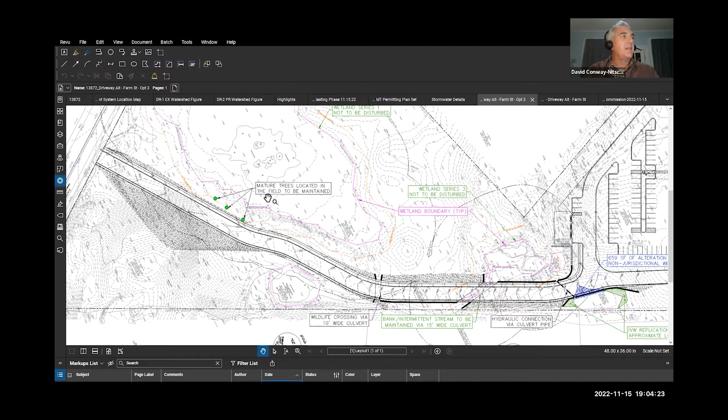Working from what we've heard in the last meetings and also the site walk, we revised the layout. If I miss anything from the folks that were there on the site walk - Dan, Jim, Rebecca - please speak up. But this is a revised layout, and what we've done, starting at Farm Street, is we've pushed the road farther south, so that we're now almost completely out of the 25 foot. There's a little work being done in the 25 foot of wetland one.

The green dots are some trees that we field-located on that site that we want to, as best we can, keep and not impact. One's obviously close, but this tree, for example, used to be in what would have been the middle of the sidewalk or on the edge of the curb. So we were able to pull the roadway out of the 25 foot in this area and save some significant trees that add a lot to the site.

As we move farther down the road, we pushed - and this sounds a little counterintuitive, but it was a good observation from the site walk - in this area here, just north of the road, there isn't any significant vegetation. By pushing the road a little farther away from wetland 2, we give it more space to breathe, and maybe present some opportunity to have some plantings along here as a better buffer.

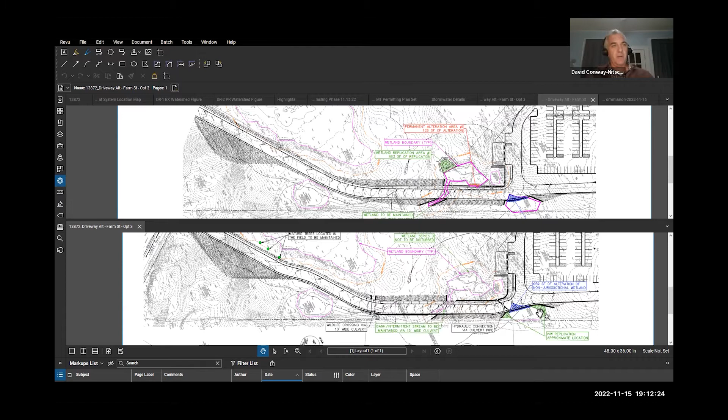Are you also adding the wetland replication area down by 4? Yeah, and that would be one of the more detailed things that we would need to figure out, because if you go out there - again, it's not jurisdictional, so it's not required.

There seemed to be an easy way to add some replication area, and these areas are approximate, because I think as a group we wouldn't want to - let me zoom in on this area real quick - if you go out there, this area has trees in it, right? And just to hit some sort of number, I don't think it would be right to say we're going to triple the size of 4. We'd have to cut down trees and start regrading to do that.

And to me, that kind of gets to the point of where you start chasing your tail. So what we'd want to do is map out where we can do some replication that's not really going to alter the landscape. We're not going to start cutting down healthy trees to get 3 times the number when we don't need to do that. But we'll take our cues on that from the biologist and from you folks.

Yeah. So it lined them up. There we go.

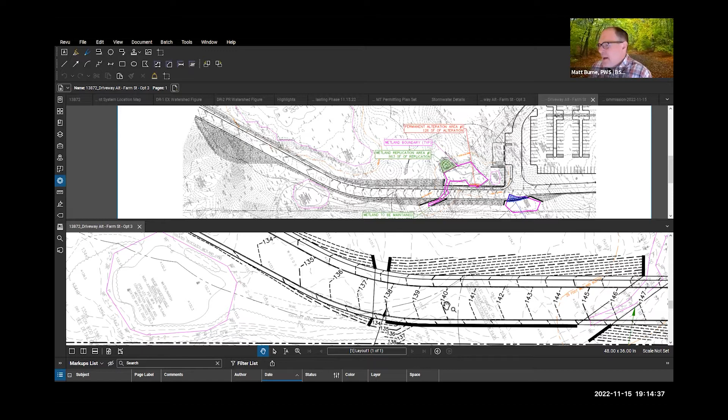Yeah, I don't think that was a big deal. That's the fine tuning, you know what I mean? You can see we have the grading even across it. We're working to make this one, just so you know, like even today, figuring out what's a good height that makes it a viable wetland crossing. But that's the type of stuff that we want to incorporate into a final version of that.

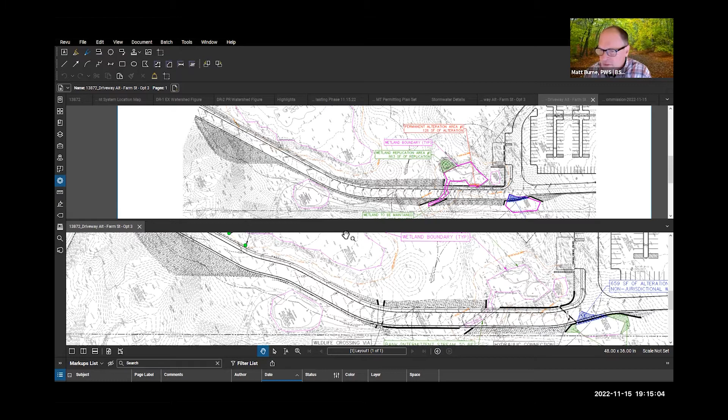So if the commission is agreeable, then you'd go into some finer detail on actually figuring out how it's designed. Yeah, and we can pull those back, so it's not like a feeding tube, you know what I mean? I think that's what you're getting at, right? Kind of a wider opening chute.

Now, I'm curious about non-jurisdictional wetland 4 impacts, the addition of that drainage. Is that necessary just because of the volume displacement that would be required for fill, or what was the thinking on that?

So it's not, it's from the engineering standpoint, Matt, from what I understand, it wouldn't be at an everyday elevation where this thing would be draining out constantly from 4 to 3. So we have to very carefully pick that elevation so that it would replicate where that area currently overflows.

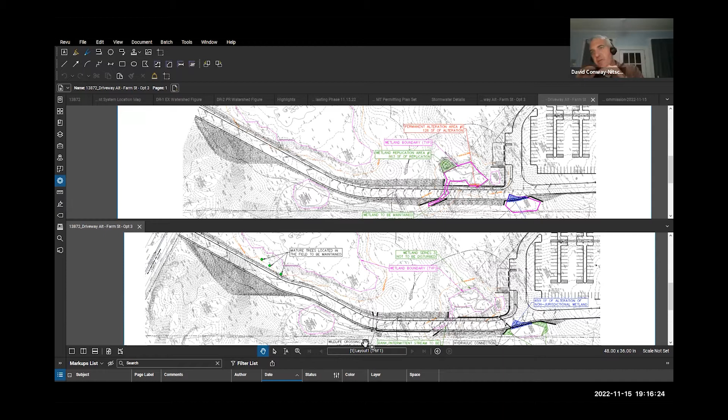And so it's going to be some variation, I forget the number, but we have to go out there and look. We have these contours on it, but it undulates around the edges. So I think we've got to look at where we think it overflows, shoot an elevation, and that's where that pipe would be at. It wouldn't be up against the bottom of the wetland or anything like that. So we have to carefully figure out how that's actually working when it does fill up, and then we can set the elevation at that. And that doesn't change the landscape for the jurisdictional status of that.

Okay. I believe we've had some abutters or public members observe water under certain conditions making that route. I've actually seen it, we were out there. We actually have video of it.

Dave. Yep. The 100-foot buffer actually extends out to include a lot of these non-jurisdictional areas. Wouldn't they be offered buffer zone protection because they are in the buffer zone? Yeah, so the work with them is all part of your jurisdiction.

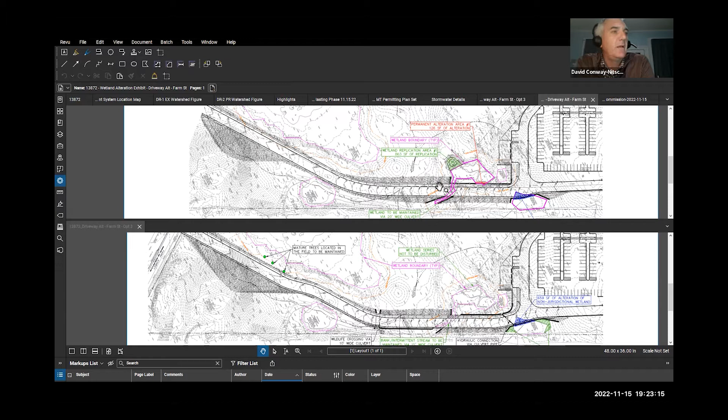So any other thoughts, and if it's easier for folks—I have one more question. Did you guys do any test borings along the proposed roadway? Not the big test pits, but any kind of borings?

We did, and I know you asked me that while we were out walking. I just don't have that handy. Maybe Paige can pull that up while we're talking, but we did do it. You know what, hold on, give me two seconds.

So this is the same version as what was just on your screen, except what we're showing here is the blue line with the dots, which is the stakes and the center line of the road first proposed back in October that we talked about. And we have a test pit here, we have a test pit here, and a test pit here.

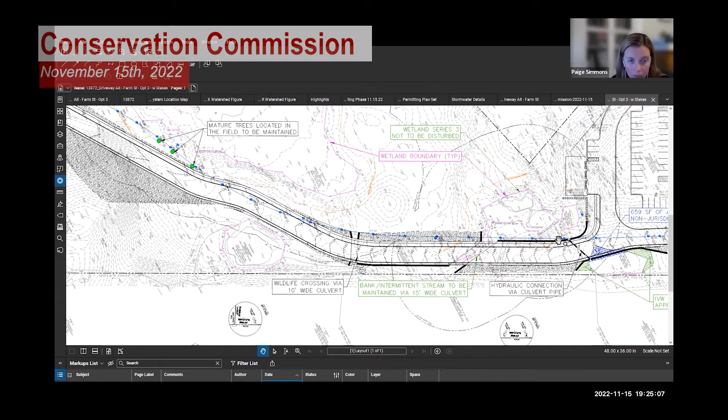And the fourth one you didn't get, right? They only did it in this area, and then looks like there's one they couldn't get to. I don't think we did this one. I think that was one that they wanted to get and they didn't get it. Right, but there were too many trees there. Yeah, I think you're right. Also one right up by the top of Farm Street, at the very top. Oh, there it is.

And Paige, just correct me if I'm wrong, but do you remember? I think they're all fairly shallow to bedrock. I don't know off the top of my head. Well, in general, the site was shallow to bedrock. Shallow being what, 2 feet, 3 feet? Probably in these areas, we'll get you the exact numbers. I know when I was there, they dug one hole, the hole that I saw, they were down 5 feet.

So I'm still questioning that, because we were going to talk about ledge blasting and maybe avoiding blasting, or is there other ways to get your utilities in there that would protect it from frost and not create any damage by blasting? And so unfortunately, no, right?

We're going to have to blast. The water lines require 5 feet of cover. The storm system, just even removing the ledge from this knob, we're going to have to blast to do that. And blasting is actually the least intrusive kind of method of having to do that rock removal.

And we did talk to one of our blasting experts, and I know there was concern about whether we're going to crack the rock beyond the blast zone and impact the wetlands. And what we've been told by people who do it for a living is that any sort of fracturing of the rock—what they do is pre-drill the blast holes on like a 4 to 5 foot spacing, pack the holes, and then make the blast. There's no cracking of the rock more than half the distance of the spacing from the hole. So 2 feet from the blast hole would be the extent of any rock cracking that you would expect.

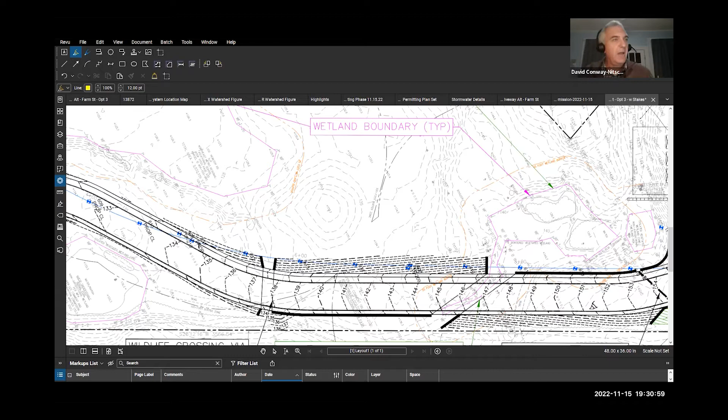But you know what, that's an exercise we can do. We can kind of, once we start to layer on these utilities, because obviously we're not looking to do more blasting than we have to. If I was to look at this section, say through here, we can have the water line under the road in a fill section.

That's not an issue, so that's something we probably could do, like a little color coding of our best guesstimate. Sorry, I interrupted you about the ledge that Joe wanted you to talk about. Just that the trade-off is moving away from the wetlands and wetland impacts - we now have more ledge impacts.

Dave, one other thing is I was scaling off the section where you've got it being sloped on both sides of the road, which you don't have now. Well, yes you do, but the width ends up to be like 75, 80 feet. Is that about right, from toe slope to toe slope on each side of the road? No, down the other end towards 3, in this area here where you're going grading, just off of...

Can't read it. I'm just putting this in because I can adjust it and you can tell me kind of where you're talking. So what kind of dimension were you looking at - right where you'd get these 2 wing walls?

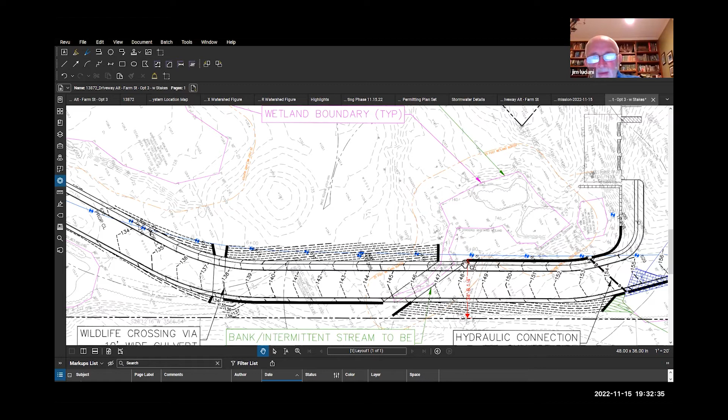Would we be better off to do a wall on both sides and have less disruption? What do you got for here - 50 feet? Yeah, it's like 50 feet, about 50 feet. Okay, my drawing was showing more. Let me make sure I get the right scale. Nope, I don't.

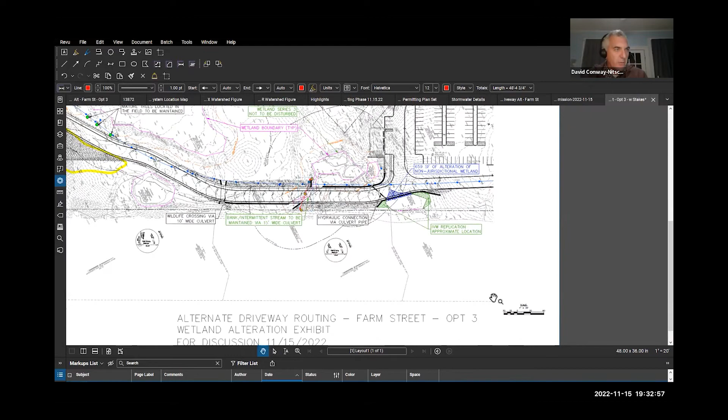So you're... the danger of electronics - we actually had a lecture on this in my office the other day. Sorry.

That's like 70 feet, something like that. Now these again, so these are 2 to 1. So one thing - I think it was Matt - I'm hearing a desire that maybe these get opened up a little bit more, so maybe this comes at a little bit more of an angle or something to address that.

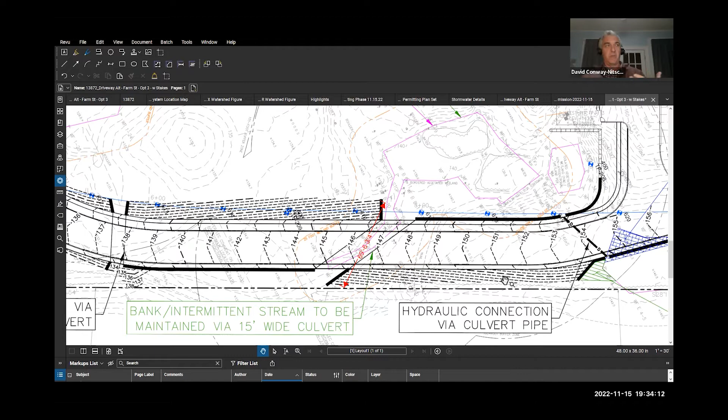But then again, these contours were created at 2 to 1. So there's also areas where, if there's a desire to kind of draw that impact in a little bit, we can do it without walls by just doing riprap. Now there's areas I definitely wouldn't want to do that because I don't think it's kind of what we'll be looking for. But if it... again, that's kind of the next layer.

If there's some - we can with this layout, it's now easy to walk out there and say, I don't remember them being there, but if there were significant trees like we picked up over at 1, what can we do to kind of work around those?

I can follow up on Jim's question about the depth to bedrock. I just checked the geotech report and it ranges from 4.2 to 5.6 feet across those 4 test pits along this portion of the roadway. So it wouldn't be much blasting then anyways, right?

So it sounds like it's about a foot of conflict between... Yeah, so at that level, to get the water line in, they're not blasting - they'd probably chip or drill and chip or something like that. And then we'd have to see where the stormwater detention system's going and the elevation that might need to be blasted out. But yeah, you're right, if we're sniffing around that, in general they try to avoid blasting where they can.

It's not... and that was from Paige, that was from existing grade, right? So you're actually up about a foot in that area anyways, aren't you, with the finished road? So you actually might have it, or pretty close to it. Yeah, and also in general we push the road up, you know what I mean? So the test pits were kind of down closer to the wetland - in general we're now up higher.

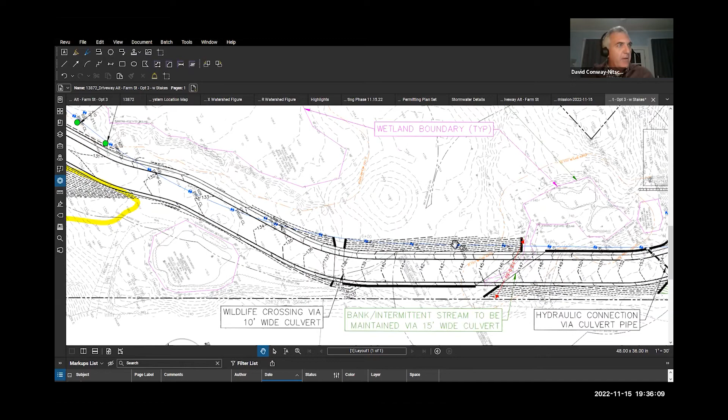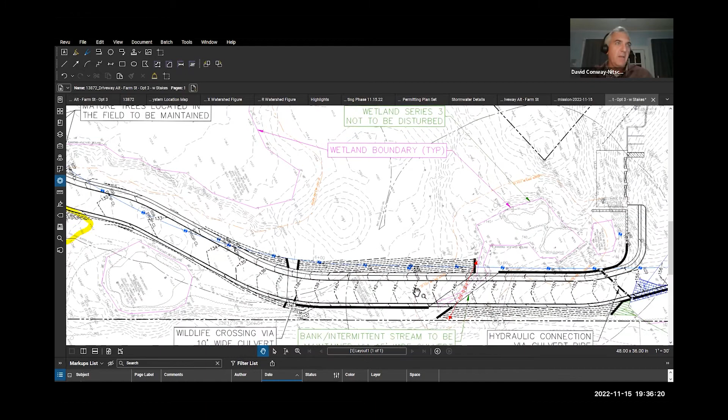Through here I think we can safely say we're in ledge, but down here, just even at existing grade, we push the road up higher and farther away. So actually it's something we can look at and kind of do a little color coding of our best guess. Yeah, you may just hoe ram there and not need to blast at all. Sometimes what they like to do, and it's actually the best because hoe ramming - even they'll pre-drill and then hoe ram. Yeah, that's kind of a nice method, especially for trenches and things like that.

Now you have to give all your blasting data to the fire chief, right? Yeah, they have to pull the permit with them, and they have to give a drill pattern and all that stuff too. That goes to the fire department?

I've never gone through one of those submissions, but I think we can have someone submit the blast plan, marking out the areas where they're going to put their monitoring.

There's a lot about storage, a lot about procedures. Just so folks know who are listening in, the people who do this is all they do, they don't do it on the side. These firms are multi-generational, so it's not wily coyote type stuff.

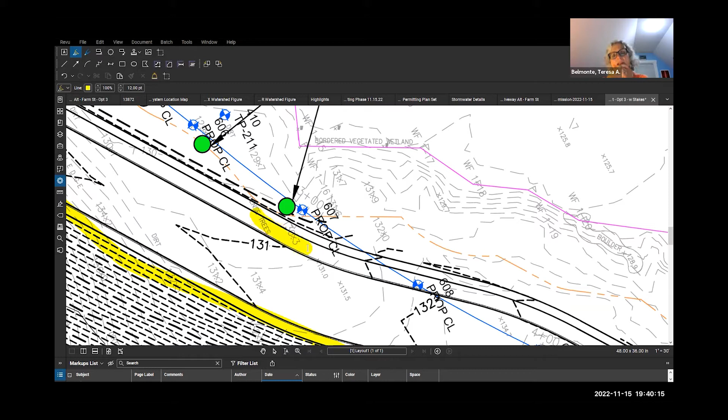And that outermost strip that you see is actually the landscaped shoulder. So the sidewalk ends right there.

I was even suggesting for this specific tree, like other thoughts I've seen done is, okay, the school's not going to be built in a day - what if we get towards the end and this tree is obviously failing? Not that we would go out looking, but what would its replacement be? What can we do to make that right?

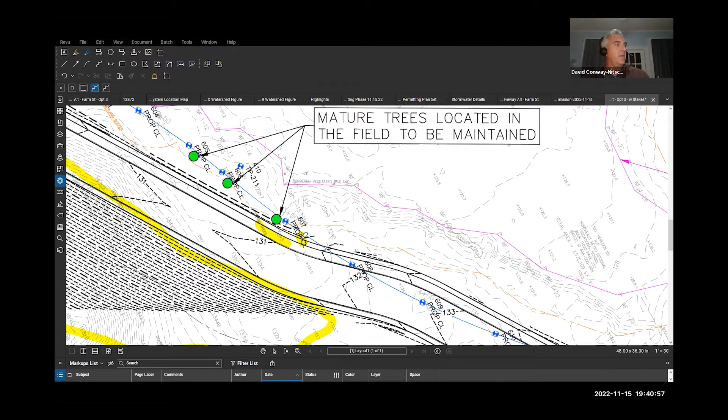But I think that's something for you guys to take another look at. I think there were trees behind this one that were just not shown.

We kind of use this one as like the fence. There was a grouping - anyone who was there that day, I think there was a grouping behind this tree that was fairly nice. We used it as a fence to build a new alignment off of.

Well, it's gonna rain tomorrow, so I'm gonna go out there and see if I can see some water flowing.

So I don't know if you guys - it's 7:40, do you want us to walk through some of the stormwater management and approach? Again, we're doing this at a level so you can see how we undertake the analysis, so you can have some comfort with it, but not like a peer review level.

Do you want to let anyone comment on it yet? Bob, any of the abutters or anyone? Before we go too far, first of all, does the commission have any other specific questions related to this driveway and the changes proposed?

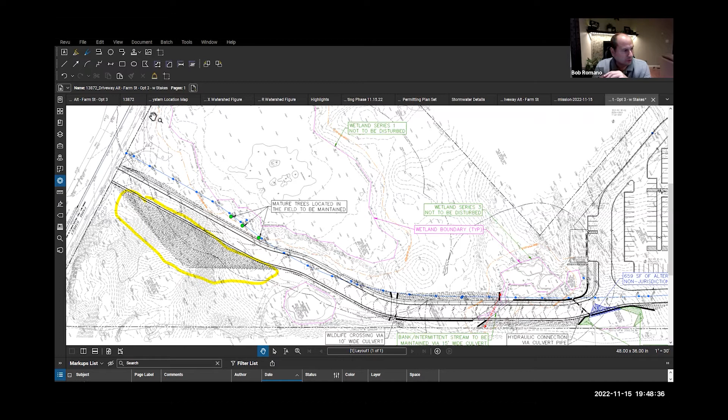All right, so we are a little bit at a crossroads. We could start a stormwater management discussion, or we could hold off on that for a bit until our own peer reviewer has a chance to review what is already there. If we choose to do that, I'm asking the commission's opinion.

We could also right now just open it up to the public for their questions instead of getting into stormwater. What's the commission's feeling? I was under the impression we were trying to satisfy one of the comments, which was that we go for such a long time that people forget what they were thinking of at the start. So this was just a method to break it up so we got a few questions out and then move on. Okay, yeah, I think it's a good idea, so we can do that then.

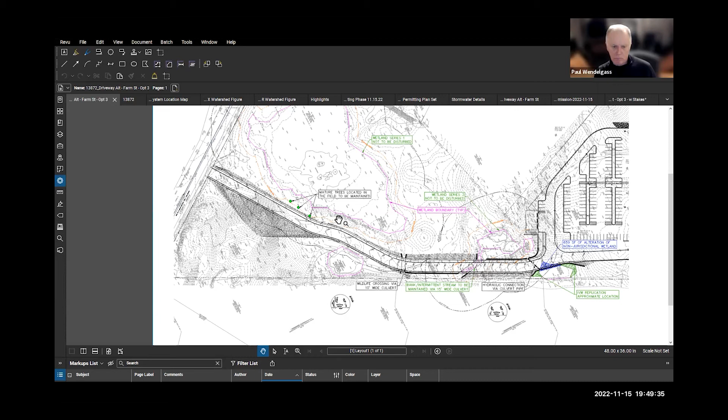We can open it up to the public for Mr. Chairman, questions. Um, if I could briefly, somebody's trying to say something? Joe, actually. Oh, that was sorry, me Joe. If I could. Oh, no problem.

I would just like to request clarification with the timing change. Does that mean that if we're going to the public comments, we won't have a chance to talk about the stormwater? Because I know we've been talking about it for a couple of meetings now, and I would really hope that in consideration of switching the schedule around, that once we hit 8 o'clock we don't say, well, it's been an hour now and we can't talk about it again, because then that's a month and a half of talking about it.

So let's see what we have for questions, how quickly we can get through those, and we could begin a stormwater discussion after that. You just took a couple minutes talking about it. True, got me on that.

If I could ask one question for the applicant team: with the changes you need to carry forward, does that materially affect your stormwater design? No, and actually what we're going to put up there was from the first version you guys really didn't like, just to kind of show you the concept, and the concept's not really changing. As far as the stormwater strategy for this area, the approach is still similar, but we have to work out more details, again focusing on the engineering, not having concentrated flows, things like that. But the approach of capture, clean, and detain is still the same.

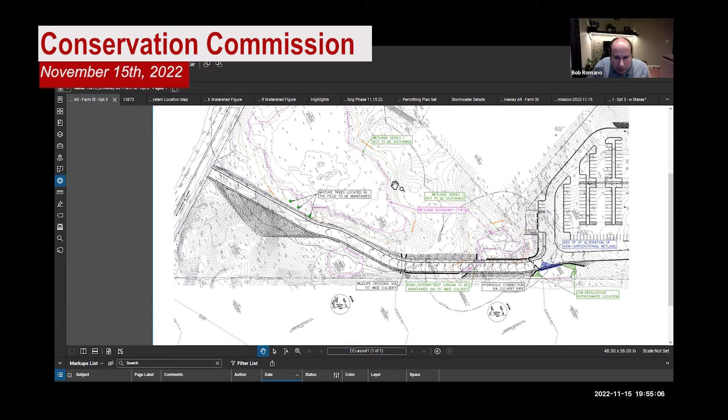So there are three connection points - well, two hydraulic connection points shown and another wildlife crossing. We've talked about what the heights of those would be, and the newest one we don't know yet. But there was talk about that first culvert being of sufficient height to let pretty much anything through that would need to get through. I don't remember what that height was.

So that's kind of the stuff that Matt covers in his letter, making sure you design these to meet the needs of the wildlife - where he talked about pulling back, since this isn't like a feeding tube for something, pulling back these wing walls and making this more wide open. That's the stuff we'll start to detail, start to draw in more detail. The preference would be that larger mammals would certainly be able to get through there without crossing the road.

Jennifer, I don't know if that answered your question or not. Yes, thanks. Okay, I'm not sure who is next, but we'll go alphabetically. Christine?

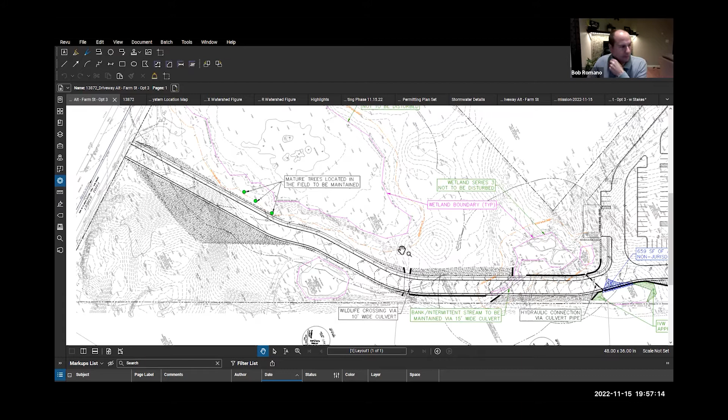Oh, no - can you just post it so everybody can see it, for the record? Oh, excuse me - Woodland Road, Wakefield. All right. I don't see any reason why we couldn't put it on our website. That would probably be the easiest option.

Did that answer your question? Absolutely, thank you. You're welcome. Linda, please go ahead. Linda Ireland, Nowell Road in Melrose.

Just to follow up on Jennifer's point - the actual interaction between all those wetlands is pretty complex. The way this culvert, the Series 3 culvert, is sending the water south east, that stream actually curves back across into that roadway and heads towards Series 1, and I don't see how that's going to happen. Whereas if the roadway was elevated there, you'd be minimizing the impacts on all of the hydrology of that region and the amphibian migration, because this is spotted salamander territory, as well as other amphibians.

The other point I wanted to make is that the area that's going to be blasted is priority habitat for the Hentz's red-bellied tiger beetle. It's mapped priority habitat - that's a rock outcrop, and it adds to the overall damage that this project is inflicting.

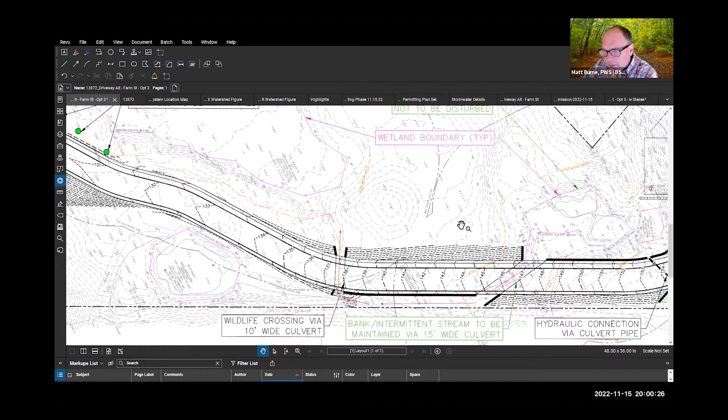This was all done in reaction to maintain this corridor. Based on the contour mapping, it does look like you've hit those points. I think the turn back toward wetland 1 occurs actually over the property line in the right of way, by the looks of it.

Yeah, it's just being a fuss budget. I get it, water doesn't respect the property line, but I think you also have to think about maintaining the water.

Yeah, and visually we have a graphic for you that we can show how we consider that one of our design points.

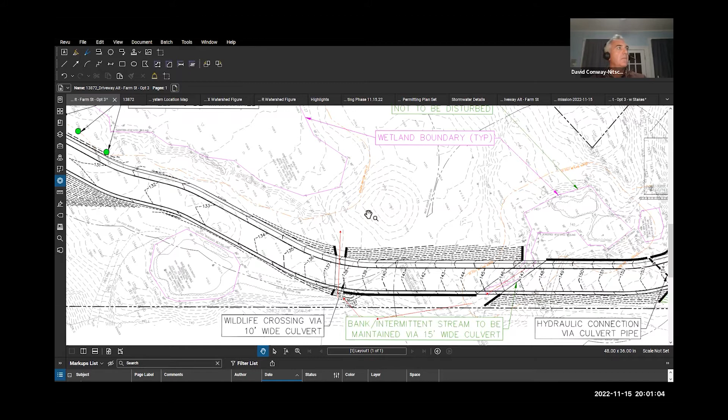Sorry about that. Bob Brooks, 7 June Circle. My question is, when you're talking about this roadway, it does go from the elevation downwards towards Farm Street, correct? And I look at, there's a low point actually in a little bit here.

So we're looking at about the foot marker — is that the elevation in feet, or is it just marking distance? What would be the elevation difference where the mature trees were area compared to back over where the culvert was?

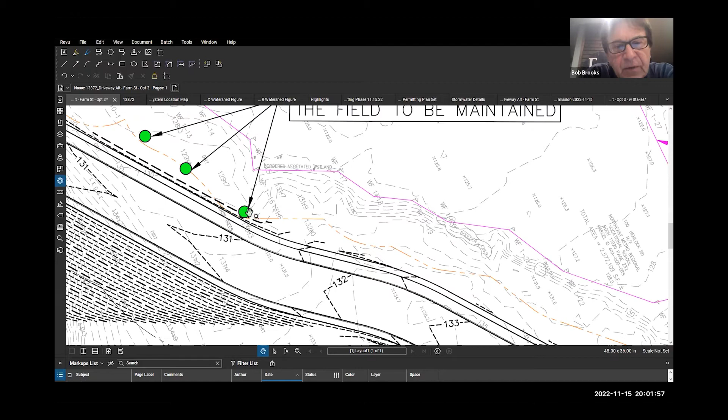So from here, go back towards the school up the road. Keep going, right about to there. What's the height difference in this?

Well, you could go back a little bit to your left, Dave. Not to give you exacts, but — I'm sorry, just a reminder, let's let the chairman direct the questions. Yeah, thank you, Joe, sorry about that. It's just human nature, we want to just reply, and it's conversational, but it should run through you.

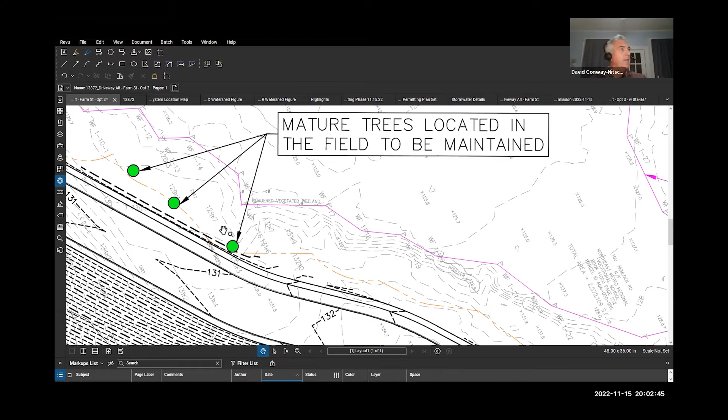Well, what are those elevations? So, these are at about elevation 140, 141. And then down here we're at 129. Okay, so there's about a 10-foot difference, correct, in elevation?

10, 11. Okay, my concern is that with that elevation and the amount of water or drainage that's going to be into wetland series 1, I think it's going to be more excessive than it is now. The question I had, because I've asked this before, and everybody's seen where the small culvert is — how do you regulate how much water gets put into this wetlands from this proposed roadway? Also, does the town engineer have a plan for this yet, or is this still in the planning stage?

So we will talk about the water budgets and what's happening in each of the wetlands. We don't want to see more water put in or less water put in that would alter the wetlands in any way, so that is something we definitely have to review.

Does the town engineer have a copy of these plans? Can someone answer that? I don't know if the town has this plan. The reason why I asked about that is because I've been down to the town office before, quite a bit in the past, and asked, and everybody keeps saying, well, we don't have a plan in front of us, so we really can't comment on it, which I understand. But—

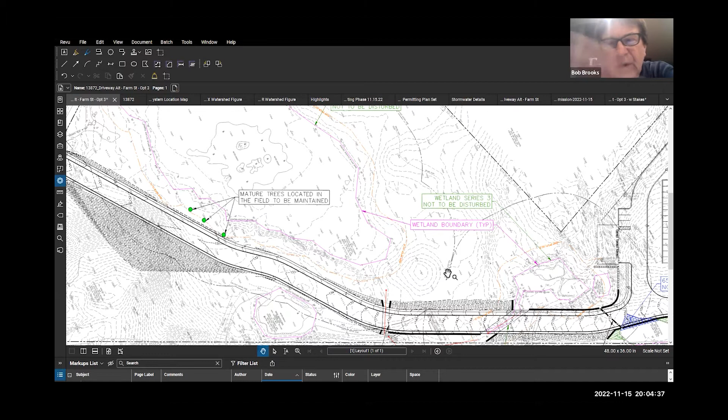The Northeast group has mentioned that their responsibility ends where that culvert is that drains into the June Circle area. So if their responsibility ends there, then the town's responsibility, I assume, gets picked up where the culvert is. That's right, Bob.

So should the town engineer be aware of this potential area? And how do you measure whether there's going to be too much water or too little water? Is there a gauge for that?

Well, that's a good one for Dave to think about, because we have to match the flow that's coming out of it now — whatever is there. That's why I'm saying you're going to have to talk to him. I don't know how they do that.

Okay, so that would kind of be answered by our stormwater overview — what the standards are, how you quantify the existing conditions, how you quantify the proposed conditions, how you regulate the proposed conditions to mimic the existing conditions, where you look at it.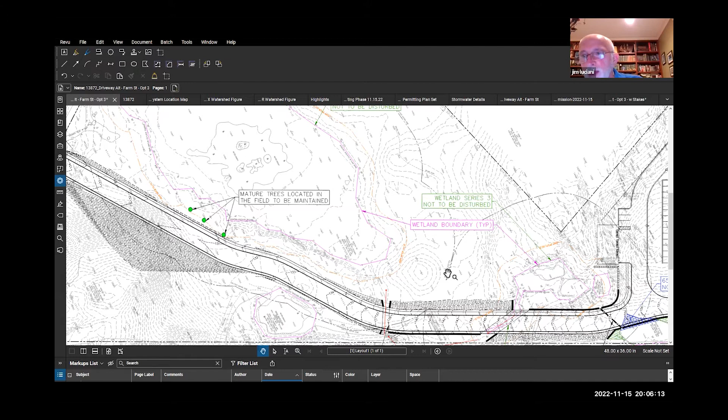Were you referring to a different Dave, by the way, or this Dave? Jim? I'm sorry, I was asking Jim. Oh sorry, were you referring to Dave from the town or Dave on the line here? I was talking — no, Dave from the — no, there's no Dave in the town. Are you talking to me? Yes. What was the question? No, I was just confirming you were asking this Dave and not saying you had to talk to somebody else. All I'm saying is your obligation ends at your property line, and then the town picks it up. So to answer the question, Jim was talking to Dave Conway. Yeah, I was talking to Dave up there. Sorry.

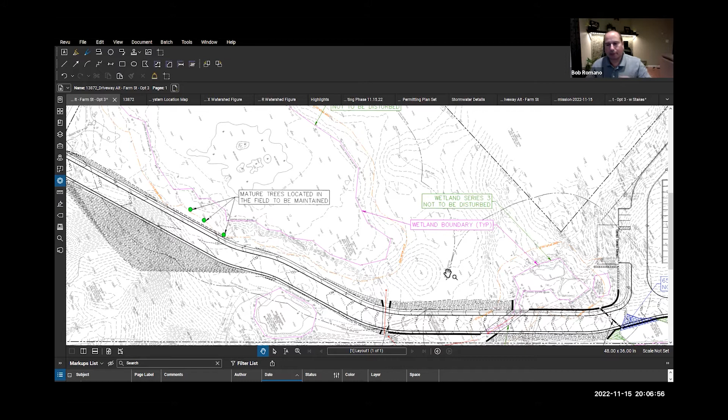Okay, so. All right, I don't see any additional hands raised. So we could start talking about stormwater, give it a little bit of time and see what you have to show us. So what I'd suggest is, do you have a target time you'd like us to present? Because we could talk stormwater for days, or we could do it very quickly. Yeah, I know there'll be additional discussion no matter what we talk about today. Let's maybe target a half hour and see what happens.

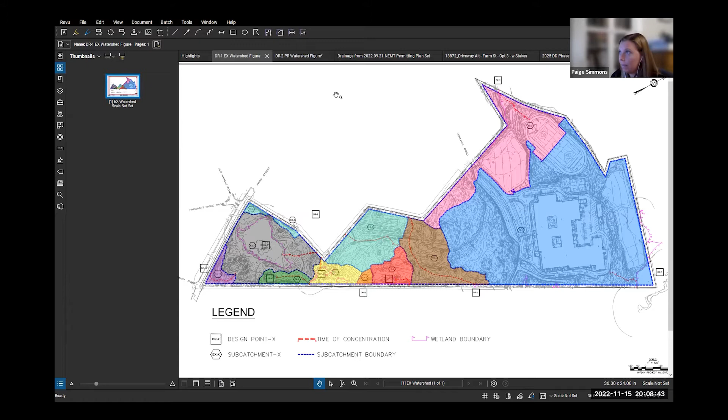And then these same 10 design points are then modeled in the proposed condition. You can see there's various subcatchments, but the design points from the existing to the proposed are maintained to be the exact same points so that we're comparing apples to apples.

And then in the proposed condition, we go through the same process of mapping out the impervious area, the pervious area, the times of concentration, and all of that is input into a stormwater model, which calculates the rates for the 2, 10, 25, and 100-year storm, which is the Massachusetts requirement. And then we compare those rates for each storm event to ensure that we're not drastically increasing flows at any location.

So that's just the big picture of the hydrology and our interpretation. And as Dave mentioned, as that roadway or driveway is finalized, those design points along the driveway will be reevaluated to make sure that we are matching as close as we can the rates at each one of those design points so that the wetland series are not affected. But that will all come as that roadway or driveway is tweaked and we come with a final layout.

And then to touch on the hydraulics, our proposed design right now is a closed drainage system. What a closed drainage system means is it consists of catch basins to pipes to drain manholes to water quality structures to detention systems. And the water is captured in those systems and then conveyed to the various different outfalls.

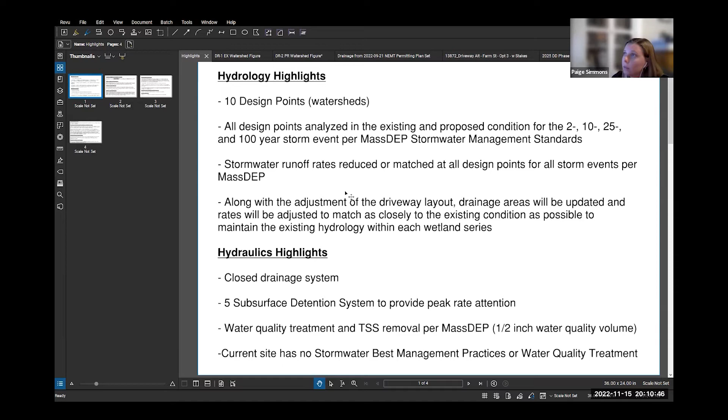So I'm going to run through the proposed drainage design and just highlight some of these features that I've just skimmed over. As you'll see, the concept is the same throughout the site, but there's various iterations of it. Also, as mentioned, this layout is the original layout that was originally submitted to the Conservation Commission, so this will change.

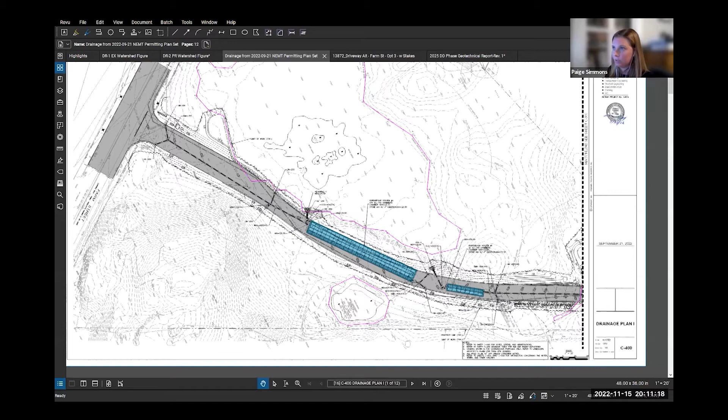As you can see, there's a series of catch basins that pick up the water at the low points. So the low point here is captured in the pipe into the drain manhole, into a water quality structure, and then into a subsurface detention system. Then the detention system discharges into the wetland. And as discussed, we're looking to separate some of these so that it's not isolated into one overflow point.

But any water on site that has experienced vehicular traffic, any impervious area, will be treated through a water quality structure so that no oils and sediments are being discharged into the wetlands. Again, a very similar approach on this side: catch basins along the roadway, a detention system, and then discharge into the wetland series.

So here you'll see a very similar system. We have 5 subsurface detention systems spread out throughout the site, and the intent is to capture the water in various locations and hold it back for peak rate attenuation so that we're not flooding any downstream areas—it'll be let out at a slower rate to mimic the natural condition. As discussed, the bedrock is very high on site, so unfortunately we cannot infiltrate. These systems are lined to prevent infiltration, but their main goal is to slow down the rates.

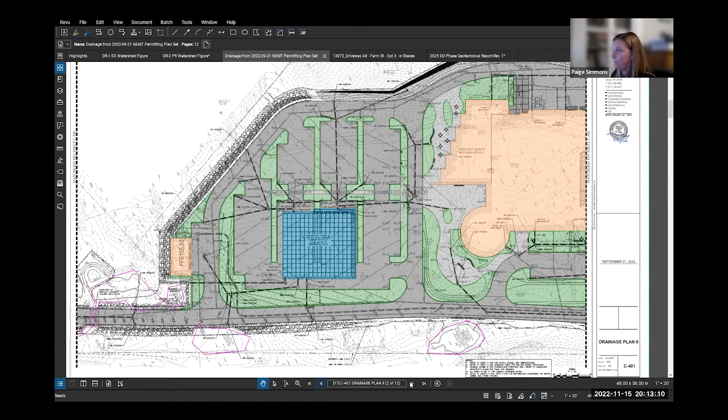Here's the additional piece of the building, and there's a series of roof leaders that collect this roof area. These are conveyed around the building on either side down to the lower campus. Anywhere there are vehicular areas that need to be treated for water quality, they will pass through a water quality structure, which you see marked with a Q for quality. That indicates all the various water quality structures throughout the site.

Heading down to the lower campus, this is infiltration system number 1, detention system number 1, which captures this lower portion of the football field and the soccer field—similar system. Then lastly, detention system number 2, which captures this upper portion of stormwater from this portion of the site. Same series of catch basins, drain manholes, water quality structures, and then discharge into wetlands series 9. So that's a very high level overview.

I can get more into the weeds, or if there's questions now, we can stop and address any questions.

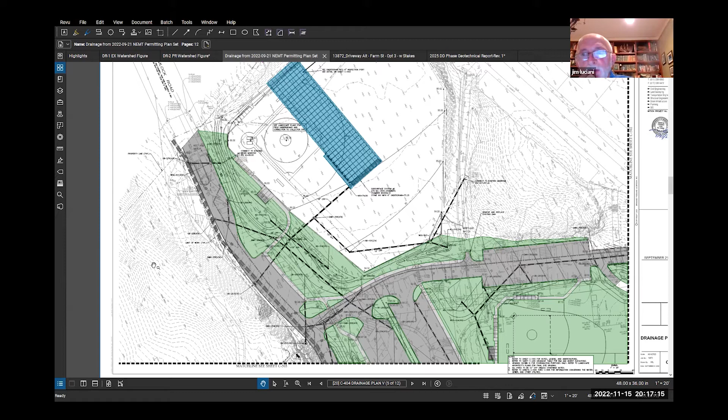It seems to me that you've got to be getting something, especially off the power line property. I know it all runs down that path. And I think we accounted for some of that. No, but how do you just account—I mean, it's just, you should—yeah, when you say account, what does that mean?

We can look at the numbers that back it up. So if you were to add up all these colored areas—in our report, the number's actually probably higher, so just graphically I don't think we showed it. I believe we accounted for them in the report; graphically, I don't think we're showing them here, would be my answer.

Okay, but maybe we'll check—you can point them out in your report. Dom's gonna ask that as well, because that's usually question 1 from any peer reviewer. All right.

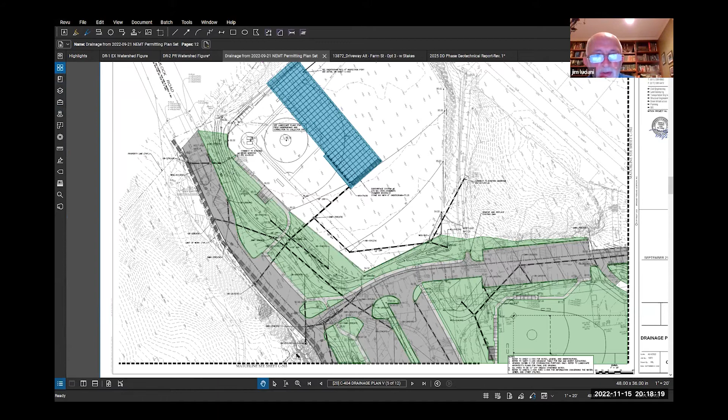So maybe you can go over how you picked your time of concentration on some of these. Because doesn't it normally go from the highest point on the drainage area to the lowest? So it's actually a little bit more subtle than that. It's the longest hydraulic time.

So sometimes you have to test it. The longest path might not be the longest time because it could be steeper. So we'll end up doing a couple of them. Another factor is the surface material, because it could be a longer distance but pavement or pipe where the water flows very fast, or a shorter distance that's grass where it would be flowing at a slower rate.

So how do you account for that then, Paige? What do you do? As Dave mentioned, we do various iterations to see which time takes the longest, but we have a calculation where you plug in the slope, the length, the material, and it can calculate the time of each segment.

For example, if you started somewhere that was a grassy slope, sloped down to a pavement section, and then the pavement sloped into a catch basin and into a pipe, you could piece all those together, add it up, and see which scenario gave you the greatest time. That's what those red lines indicate. Right, okay, I understood that.

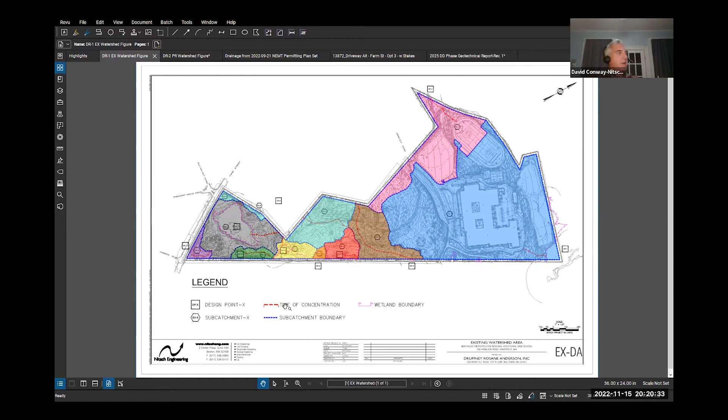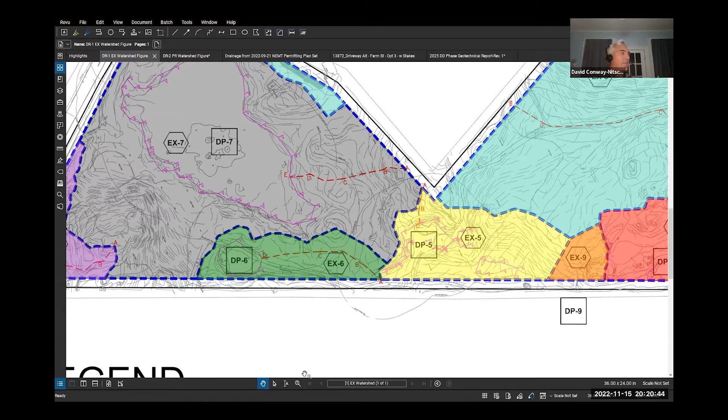The difference in the time of concentration, if you look at the gray one from here, just to nerd out a bit, you can see the red line indicating the time of concentration, and that path is a little bit shorter than if you were to take it from the farthest point away, but it's not as steep. So that's why that time of concentration is the one you use.

All these little letters indicate a change in either material or slope, so it could have changed - maybe it's less steep or more steep, or maybe it's changing from rock to landscape or something like that. Those are all basically break points where we updated the calculation. So basically, Paige, you keep moving that line around until you get the longest length, longest time? Yep, got it.

And so all the assumptions, again, the peer reviewer will check all our assumptions too - if we were to do this on the other side, they look at offsite areas, checking our delineations, the times of concentrations, surface covers. There are certain things that affect the calculations more than others and have the greatest sensitivity, and that's where they start to focus in on things.

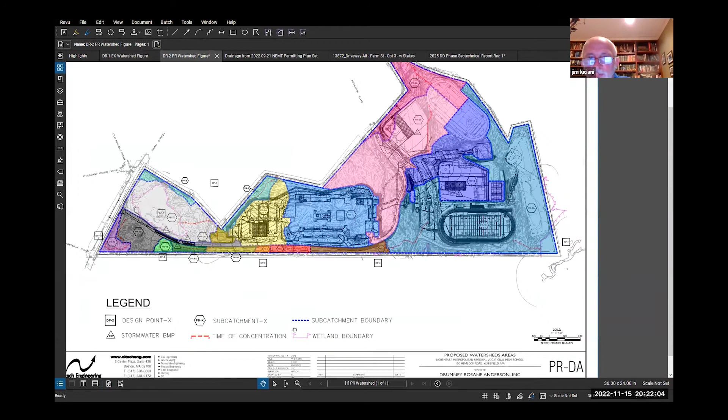Again, we generally take a fairly conservative approach, we're not aggressive with our sizing. First off, the system needs to be maintainable. We need to be able to hand over something that's going to meet the goals now for stormwater and in the future, so it's something the school can maintain. It's not some Rube Goldbergian type of system, and it's maintained in good working order for the life of the school.

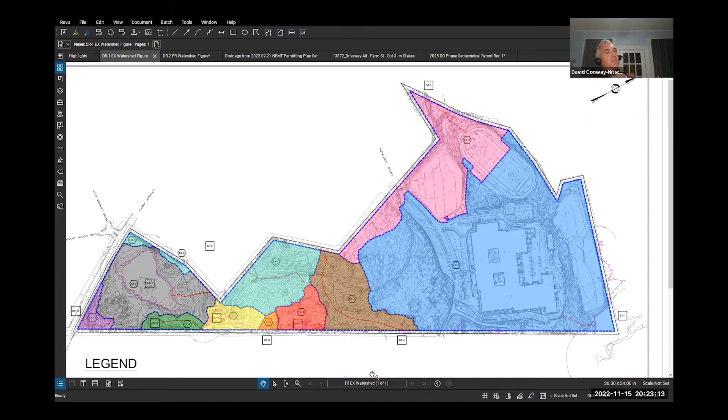So are all your discharge points going to the wetland by the field, or how did you do that? Did you mimic the locations as well? Yeah, we try to mimic locations, and one of the things we'll do, even on the ones not around here, is look at spreading the flows out, especially over by the baseball field - I thought that might be one we'd try to spread the flows out. But then again, not to take a uniform approach, the existing school discharges the lower campus to the two wetland fingers Paige is zooming into now. For those, we're going to maintain those flows, but connect back from the head walls.

There's existing pipes feeding those head walls. So the lowest impact kind of approach to that is to... She'll show you.

This is on the Breakheart side, not in the property, but on the access road to Breakheart. This is the Breakheart gate right here, between the site and the Breakheart path that starts right here. Remember, we walked down there and saw the two streams and the head walls. This is where we had to sneak through the fence to get to the back.

So where's the roof drainage going now? Through these same locations?

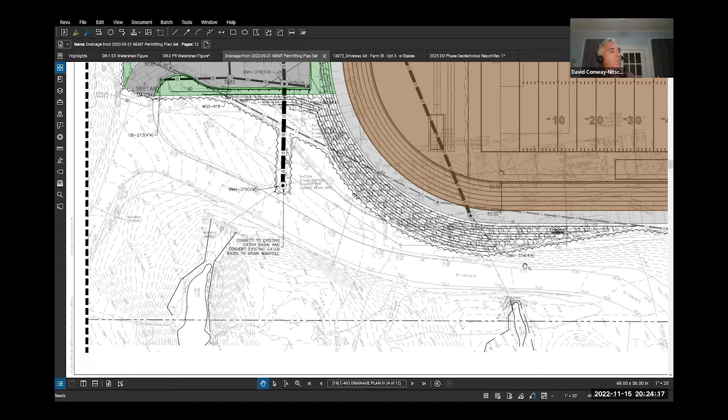So these pipes, the lines you see here, this gray line here and here, these are all existing drainage connections that discharge through this head wall. So these pipes are picking up a combination of the existing parking lot and all the existing infrastructure that's up in this portion of the campus now.

So these two locations, we're going to maintain these head walls and these connections, but as discussed, we're confirming that the rates are either matched or reduced.

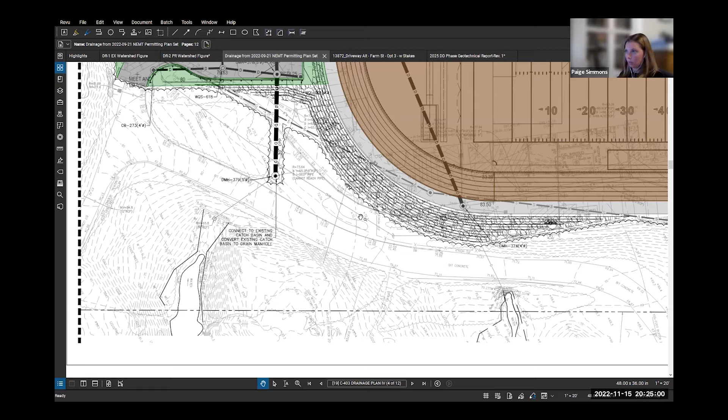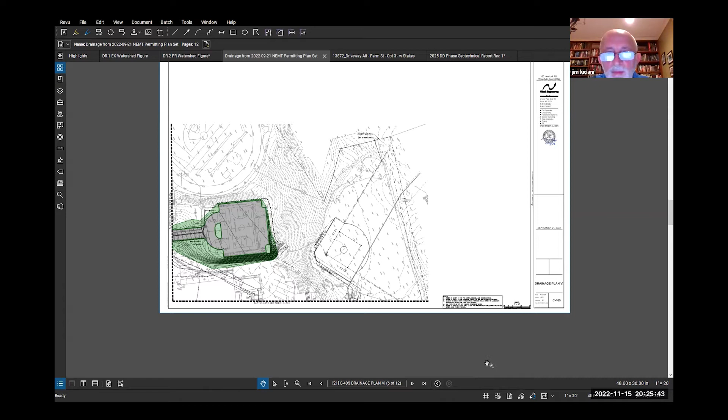We actually don't have any impacts in this area, so this is just maintaining the same condition. There's no pipes over here. There's no pipes at all on that lower section.

It just slopes off. And what did they do with the field, the football field that's up high? Let me see if I can find that. That is this one. We also aren't touching that, so it's just maintaining the existing condition.

So then at the baseball field, you do have a discharge point there. Yes, and that's the one I think was an internal conversation. I think we looked to maybe spread that out across the slope more.

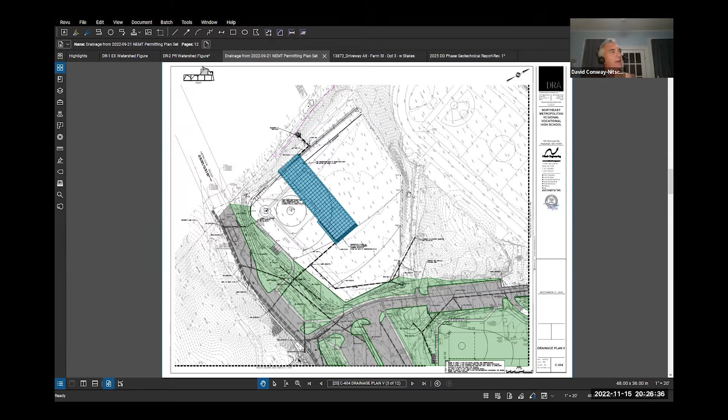That one is actually fed from parking lot drainage right now. It's what I believe is how that finger was created, from parking lot drain. There's an existing head wall, you can see it right here on the survey, that picks up the drainage. You can see a catch basin in the parking lot here, and then it creates a web in various directions. So that is the existing discharge point.

So that is part of the analysis that we compare, what is discharging to this point in the existing versus what is discharging to it in the proposed.

Through the chair, if I may, Paige, could you go back to the previous view where we're looking at Breakheart, those two discharges that go into Breakheart? Yes, let me just get there without making everyone dizzy. This one.

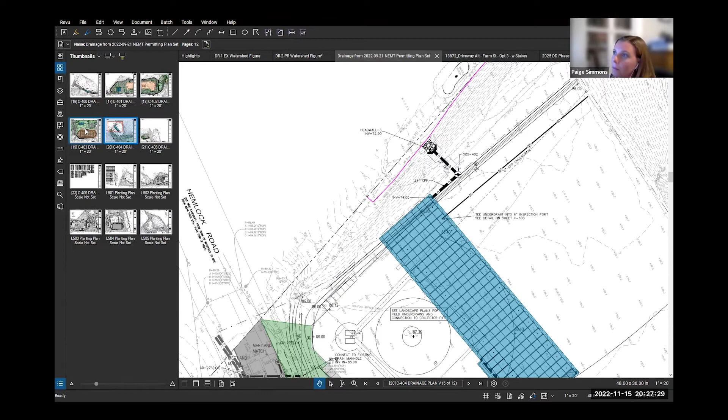Yeah, on the left there, that open water body, I'm fairly certain that's a certified vernal pool. I think you should have Dan and Andrea take a look at the implications of the discharge into that.

Yeah, as an outstanding resource water, that may need some pre-treatment. I don't actually know how that kind of runs with an existing discharge that you're changing. You just might have some outstanding resource water implications to think about, treating it to a higher level.

Possibly. I'm not really certain the permitting implications of that, but I think you all should check to see whether or not that's certified—I think it is—and then figure out what needs to happen to have that remain a legal discharge.

And we can talk to Andrea about that, and Dan. I might even have an opportunity to—we can definitely look into that. My mind's already running through some scenarios.

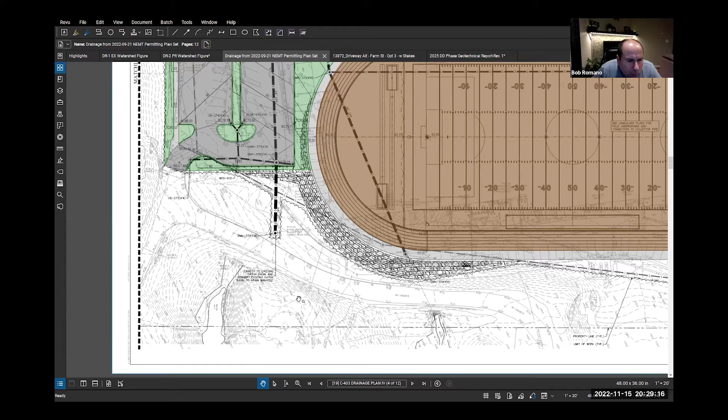Are there any other questions? What was proposed there right now for water quality? Is it just using what's there, or was any enhancement proposed? So what's proposed is deep sump catch basins and water quality structures.

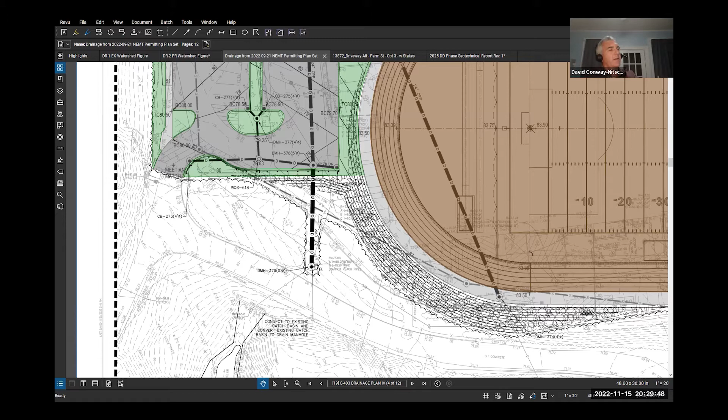And the lower campus is where we see a bigger reduction in impervious area, because we're taking out the existing school and a lot of the parking, rationalizing the parking a little bit, and then adding the fields, filling the parking with some green space that was much more limited previously.

Is that field proposed to be a turf field or grass? The brown one is turf. And the baseball field, would the soccer field also be turfed or grassed? I believe this one is grass and this one is turf. Dave, correct me if I'm wrong. Yep, that's right.

So any other commission questions regarding this? No.

Okay, I will ask the public if there are any questions regarding what we just saw. Asking that we keep the questions to what we just briefly saw. I do see Christine has her hand up.

Go ahead, Christine. I'm just interested in the water quality structures and wondered if Paige could speak to the maintenance of those structures going into the future, when the school is operational — who maintains those, and also the testing of the water collected in those structures. Who's responsible for that? How often is it tested? Is it continuous automated testing, and what are the standards used to test that water before it's discharged?

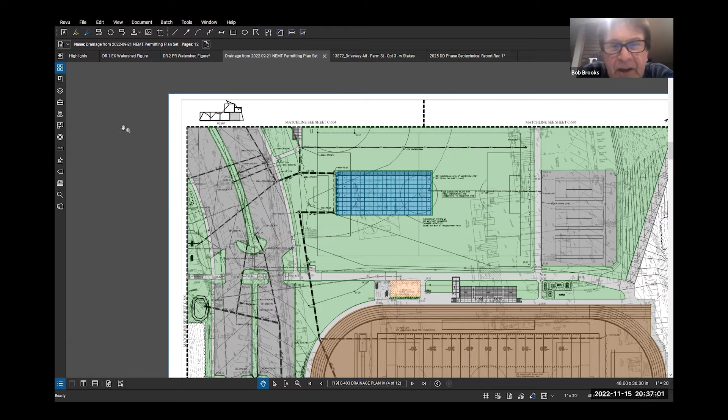The new school, right? Correct. No, the old school is fine, but school's good. Are you looking for the drainage area map or the more detailed drainage map? Probably both, but I'd like to see the full map. Maybe bring up the full map, the whole site on one page. Yeah, I think that should work as far as drainage.

Now, where the school is presently located, there is presently proposed to have a 650-foot wall on the back, with a 71-degree pitch, that's about 35 feet high. And we know that's going to be collecting water.

And there's a ditch below that's proposed to be 12 feet wide, which is going to collect falling rock. But it mentions in the report that it will also collect the water from the slope coming down, and during the winter where ice would come down and eventually melt. Where would that water go to? Because it's going to be draining downward.

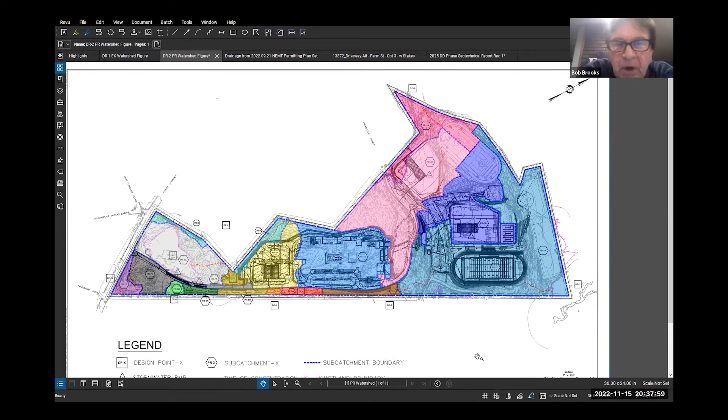Is that going to... can you zoom in maybe? Is it going to a catch basin, or is it going into the wetlands, or what is the proposed plan for where all this excess water is going? Are you talking about where the current school is, that general area? No, he's talking about the proposed.

So behind the proposed school, we're cutting into the ledge, right in the middle there. Paige is running her cursor along the rock trough. That's meant to give a buffer between where vehicles will be and the back of the ledge face. So that's at the toe of the ledge slope.

I'm just explaining it so everyone's on the same page. So that's a cut, and at the bottom of it is a rock trough that will also pick up the water from any of that rock face. And then I'll hand it off to Paige, but it heads there, right?

Yep, so this rock trough, as Dave mentioned, is sloped. So any drainage that sheets off this face or off this back parking area would end up in this essentially rock swale, which is captured in a catch structure, a basin, right there at the end of the swale. And then this catch basin continues it on to the closed drainage network, and it makes its way downstream.

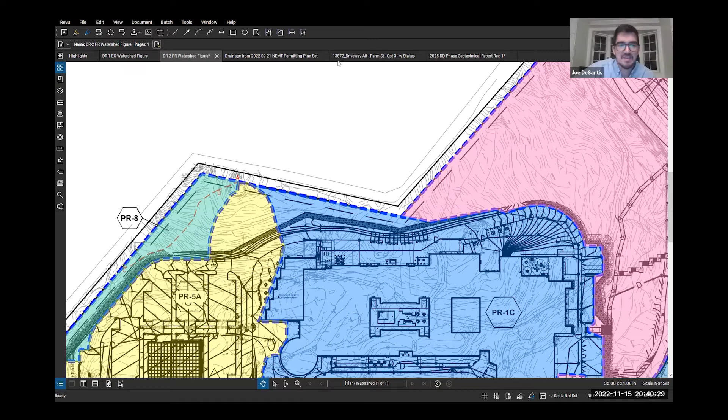Right, it is stormwater management we're talking about, and this certainly falls into that category. So the portion of the swale that we mainly pick up starts basically at the edge of the proposed school building, and then it would flow, Paige, right to that catch basin.

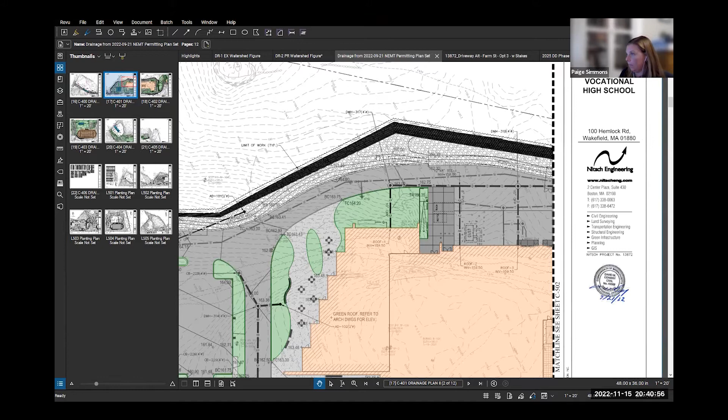Is that dark area... I'm sorry, is that the really dark piece? The really dark piece, Mr. Brooks, and Paige correct me if I'm wrong, is the ledge face, so that's the very steep part of it. And then the mottled piece at the bottom, below it, is the rock trough.

How wide is that rock trough? I believe it's approximately 12 feet right now.

We were given guidelines for that from our rock expert, for what goes into it, and there's a series of things. We'll also have to do this on the other side, by the driveway up by Farm Street, a similar feature I mentioned before. What goes into the sizing of the rock trough is a bunch of different things. He had a very detailed report, but it's the height and slope of the rock face itself that dictated the width. Even though the height varies along that rock face, we picked a conservative steady state thickness for the rock trough.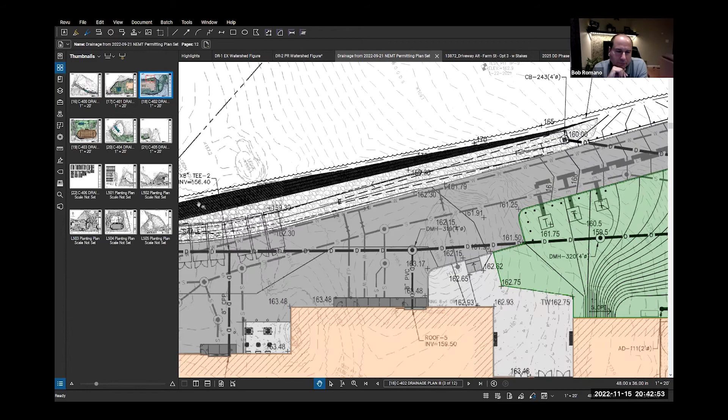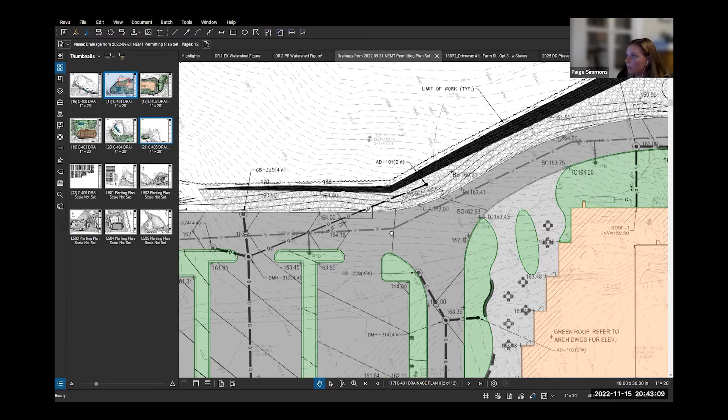So the slope starts here. This is a curb line, so this water would be collected in this catch basin and flow the opposite direction. Starting right about at this curve, the water would flow from elevation 161 down to 160, continuing this way. You can see this needs a little more fine tuning, but these are generally intended to be graded like a shallow rock swale.

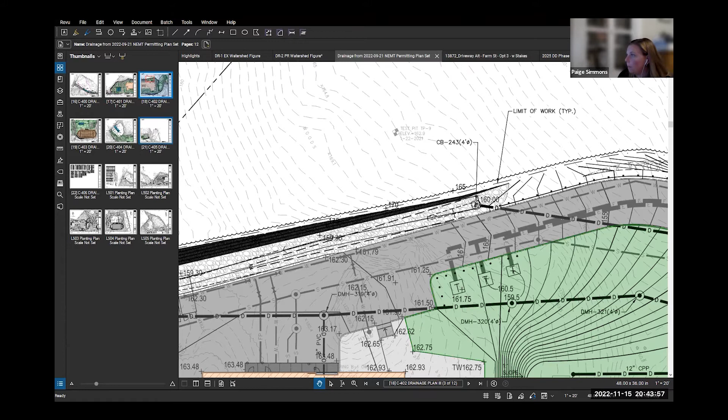So starting at 160.5, and then onto the next page, it makes its way this way, down to 159. We have to clean up these elevations, but this catch basin is lower than 160 - yes, it would have to be, obviously.

And then from there, that catch basin is discharging where? So then it comes this way, it's picked up in this water quality feature, and the reason there's water quality treatment is because this trough also picks up some sheet flow from the back driveway area, which will be exposed to vehicular traffic, so we're treating it for water quality as well. Then it combines with this other portion of drainage, which picks up the roof leaders here, and then it comes down and is discharged to the lower campus portion.

Could you zoom out there? Okay, thank you.

I see one more question, Linda has a question. Go ahead, Linda. Thank you, I just wanted to ask about the rock face, which is, I guess, 30 to 35 feet high.

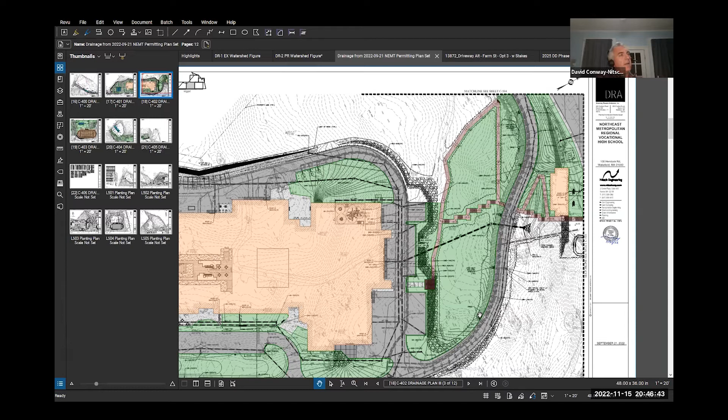And then I'd have to - the report's 1,000 pages long - so I'd have to look into what we used, I think we probably would have classified that as exposed ledge, but I can't guarantee it without looking at the report.

And has any change been made in terms of the way the water flows into the Series 1 wetland, which is at the south end of that ledge, the closest wetland?

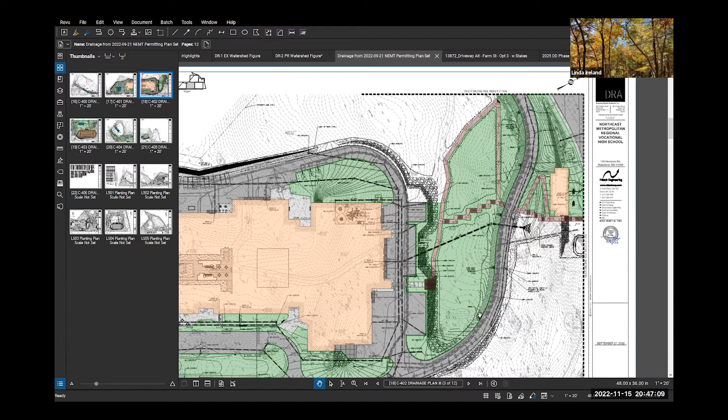The Series 1 - there are other wetlands that are closer than Series 1, but each of the wetlands we modeled as a design point, so you can look at it individually to see what was going there before and what's going there in the developed condition. Based off of the contours, it appears that in the existing condition, this design point is design point 8.

And there is a roadway, that path that flows that way, and then the other half is the pink area to the right of the page. Oh, this one, Dave? Am I getting that wrong? Oh yeah, I'm lost, I'm sorry. Some of it's in the brown.

Which would be flowing to design point 3, which is Wetland Series 10, I believe - yeah, off the top of my head, I think.

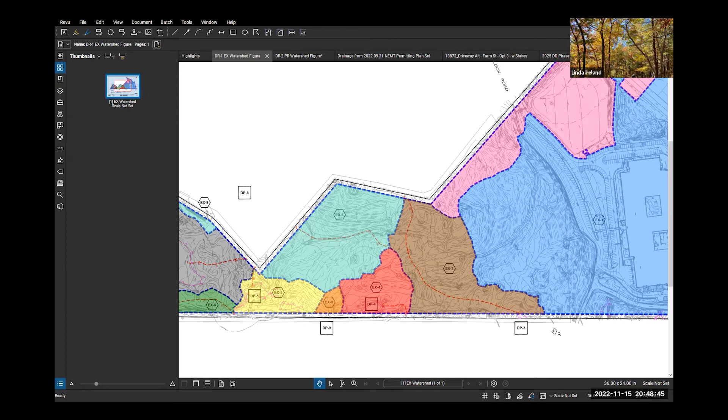So I have one more question, and that is with respect to the impervious area created by the steps. Are the concrete steps 8 feet wide by roughly 400 feet? Is that water also flowing down into the stormwater calculations? And does that flow underneath the new athletic fields?

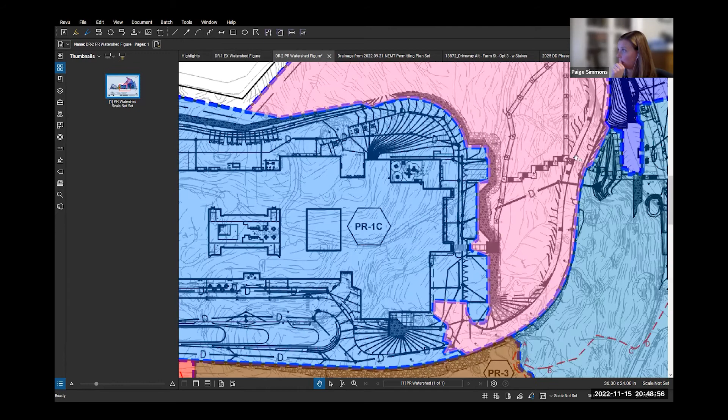I'm not sure I know what you're talking about. Are you referring to those steps? Are those 8 feet wide and approximately 400 feet long, that concrete section?

And wouldn't that also have to have salt treatment in order to keep that safe in the winter? Salt would eat the concrete. You'd have to be very careful what you put on those stairs if they're concrete, because normal road salt would eat through them.

So, two parts. If those are proposed to be impervious, that's how we would model them, and we can check to make sure. We have no desire for this to shortchange the system in some way so it doesn't work.

Not to speak for the Conservation Commission, but there would typically be de-icer used. What that de-icer would be, at the end of the day, I think I've heard there's a desire maybe not for salt to be used, which is fairly typical now for most modern projects.

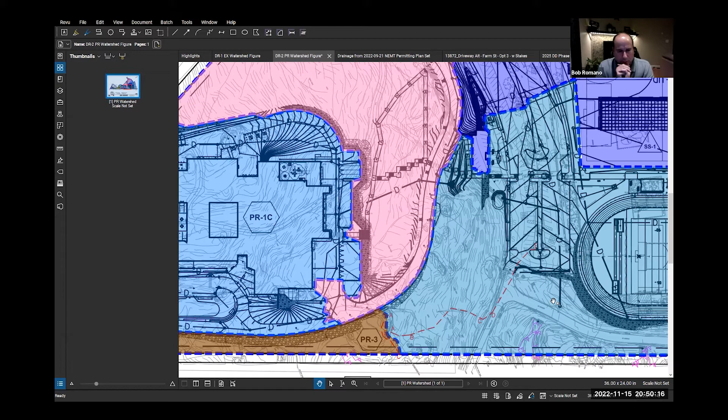So that means not rock salt be used, but some other form, I presume? You wouldn't want to use sodium chloride on concrete because it would eat through the concrete over time. There are other salts that would be less aggressive, and there are also other de-icing agents that could be used.

Right, okay. Was that it, Linda, for your question? Yes, that's fine, thank you. Okay, all right, I do not see any other questions or hands raised. Oh, Jennifer has her hand raised.

This will be the last question for tonight by the public, by the way. Which aspect of the stormwater system is the one that's referenced in the value engineering? And what is the effect on the process if the stormwater management approach is altered in the value engineering process? How would that affect the process?

Would the project come back before the Concom for further review, or what would happen then? Mr. Chairman, if I could. I'm not clear on that first question, could you repeat that? Jennifer: the value engineering report released to the public in August of this year lists identified potential cuts that include a reference to the storm drainage. So I was asking which component of the system that is.

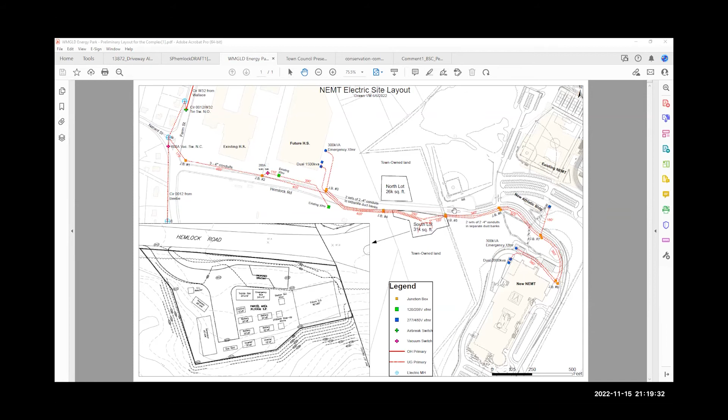It was gonna be proposed heading up the road on the right after the football field. That makes sense, yeah. There's 2 lots that they're looking at building it in, the south, what they call the south lot, on town land. North lot, south lot.

There is a parking lot up there, kind of across from Landrigan Field. So that must be the plan, left of the south lot. They want to use the south lot to put the energy park on, I was trying to figure that out.

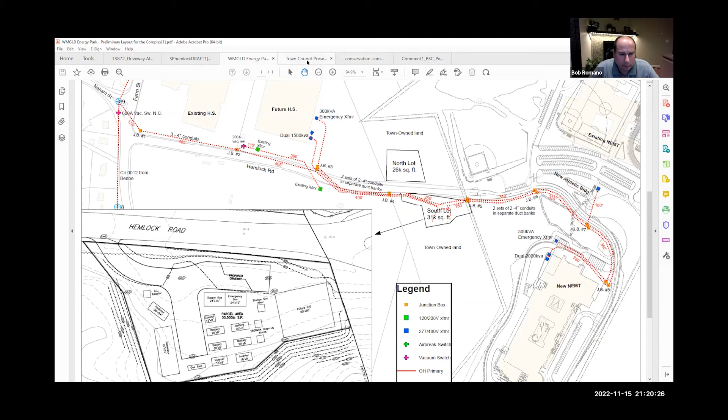I'm not sure which one would have, there's gonna be solar arrays, right? And there's gonna be some solar battery storage arrays, I think, go on the schools, isn't that correct? Roofs, and then battery storage in one of these 2 lots, right? Right, but again, the picture on the left, you see, is of that lot, right?

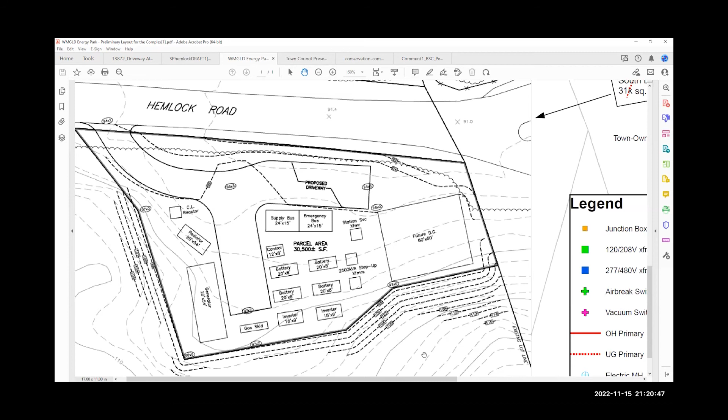Yeah, they're basically going to have multiple battery systems and inverter systems and a gas-fired generator. Here's the presentation if you need it. This is what they're going over tomorrow.

Battery storage, generator. 15 megawatt. Whoa. 15 megawatt hour storage. Wow. It's not clear how big the generator is. I mean, a typical house would be like a 20 kilowatt generator, so I don't know how big that is.

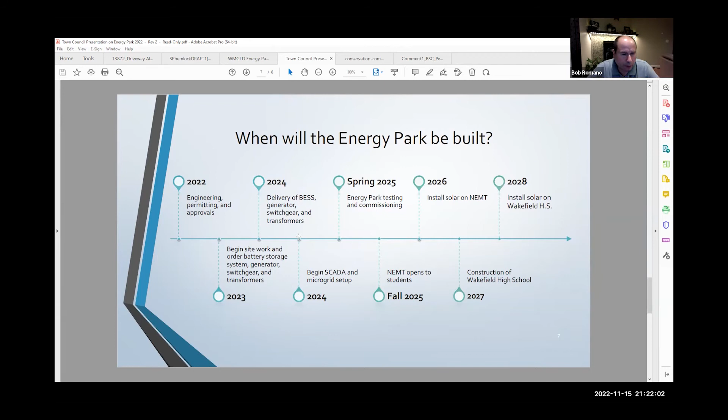Yeah, I'm curious what it's sized for. What type of outage would it handle? Is it just for emergency lighting, or to allow the school to be fully functional? I don't think so. It says it will serve as emergency power source for both schools. All right, so that's your lighting and exits and whatever's critical.

The schools won't be fully functional, they just won't be in a blackout condition. Probably keep their systems up and running too, whatever they have for servers.

Rebecca made some suggestions about the meeting. I think we should move to a replacement canopy policy requirement, talking about the trees to be replaced. About the tree policy in general, right? Ken, hold on a second, I'll show you the email.

Didn't she say they were suggesting that they would replace any trees removed by number of trees, not by coverage lost? That's the problem. Rebecca's suggestion was that we should change our tree policy. Yes, I agree with that.